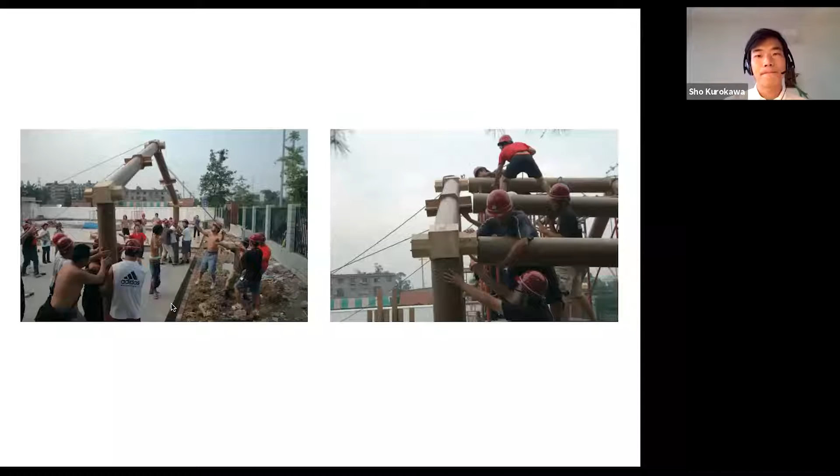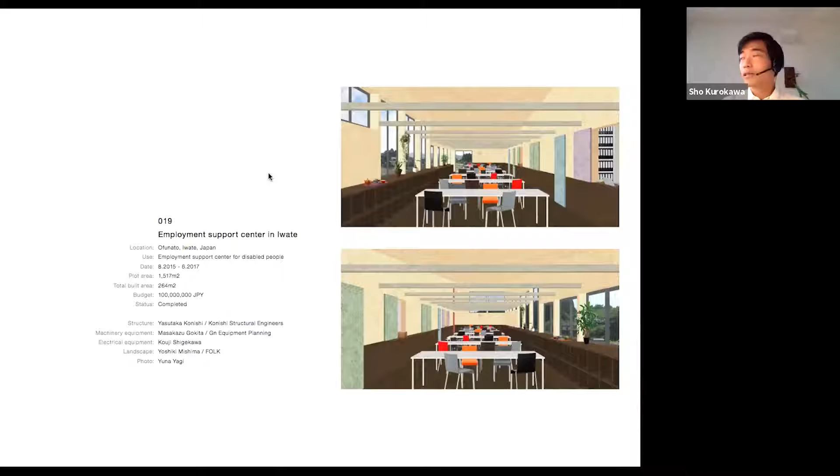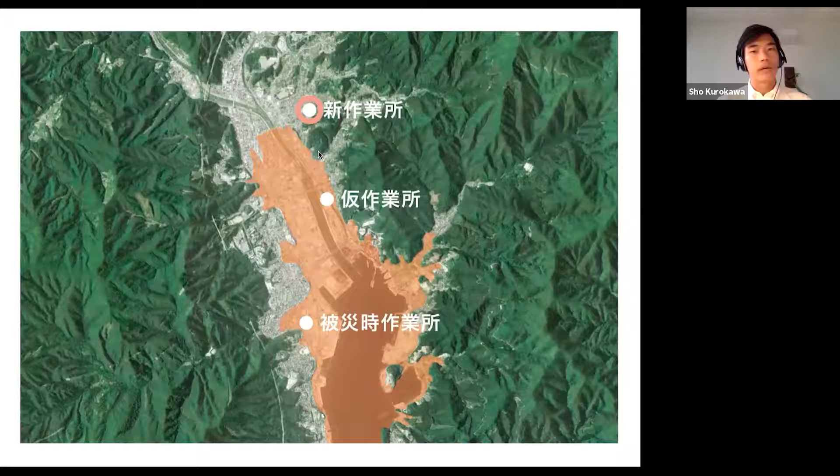They were looking for an architect and also trying to set up a kind of funding project. I was appointed by a support organization for post-earthquake activities. This is their temporary shed workspace, and this is the new site — quite a pastoral condition, whereas before it was right in front of the ocean. But now we're in a sort of hill location, and I placed a building like this, the white one.

This is basically the whole design, a result of negotiation between the philosophy of their organization, the client, and the given conditions of the project—budget, schedule. The budget was really tight, the schedule was not enough, and there was the environment to consider, plus how they wanted to settle into this new environment after the very difficult experience of the tsunami earthquake.

So therefore, I almost didn't try to make it beautiful. But it came out as a beautifully boring or beautiful banal building, yet still an interesting space, I believe. So this is the outcome.

The entrance needed to be, obviously, an entry condition, because the users needed to be ready to work when they came in through this red canopy. But still, I didn't want this building to stick out in the environment. So if you see it from the front, it has a certain presence, but from the back, it almost hides itself in the terrain, in the fields, and in the mountain.

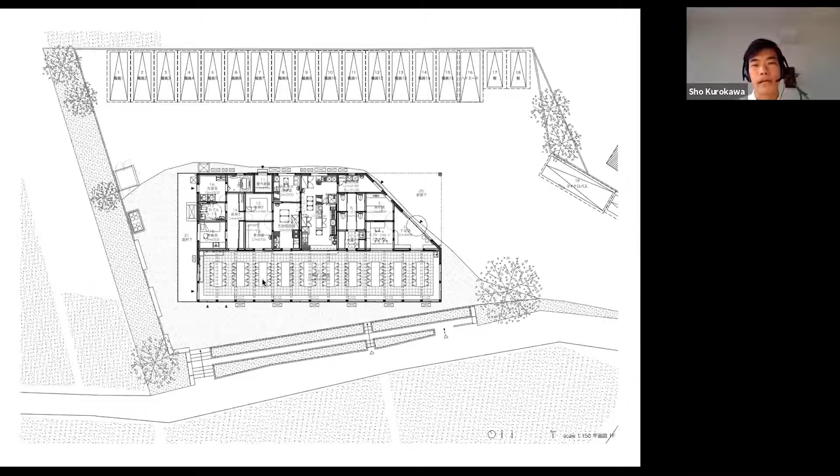And in this main space, it's full of different conditions—low ceiling rooms and high ceiling spaces, spaces full of light and spaces with less light, spaces without a view to the mountain and spaces with a view to the valley. So people here can work in the morning on the valley side, have lunch on the mountain side, and work in the afternoon in different conditions. They have choices now, not like before in one room without any characteristic—they have choices where to work, where they feel comfortable, within this very limited floor.

The spaces have different heights in each element. Only the beam stays, and also the lighting condition stays, but the windows, ceiling, acoustic condition, lighting condition, and winds all change within this one very limited room.

In the small rooms, I put in some small tricks—the wallpaper has slightly different colors. So if you come from the yellow room to the blue room or the other side, because of an eye effect, the space looks slightly different. It's a kind of trick so people can feel it's wider or has more variation within this limited space building.

After completion, there was an opening ceremony. More than 100 people came, and we sang, we danced—we really had a good party here.

A year later, I brought some musicians to the building and we had a small concert. Now with the coronavirus, I cannot visit them so often, but so far we have a very good relationship—they send us apples and some other fruits. I often call them, say hi, ask if there are any problems with the building, and so on.

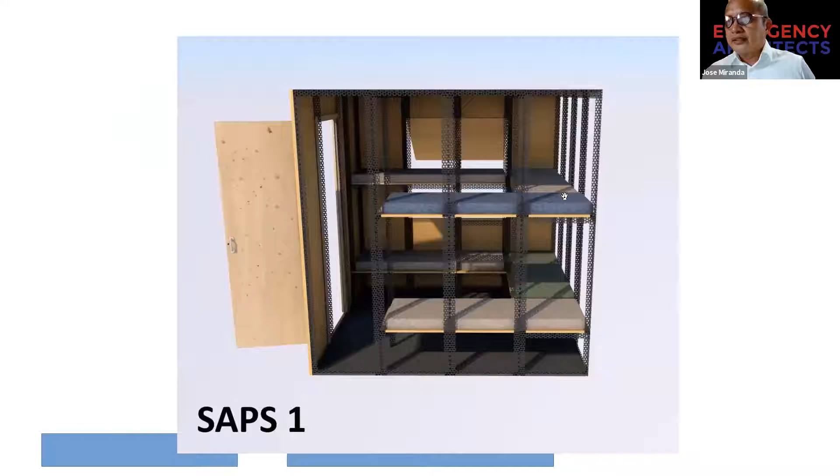Construction methodologies were brought forth towards simplest procedures with most minimal challenges in replication.

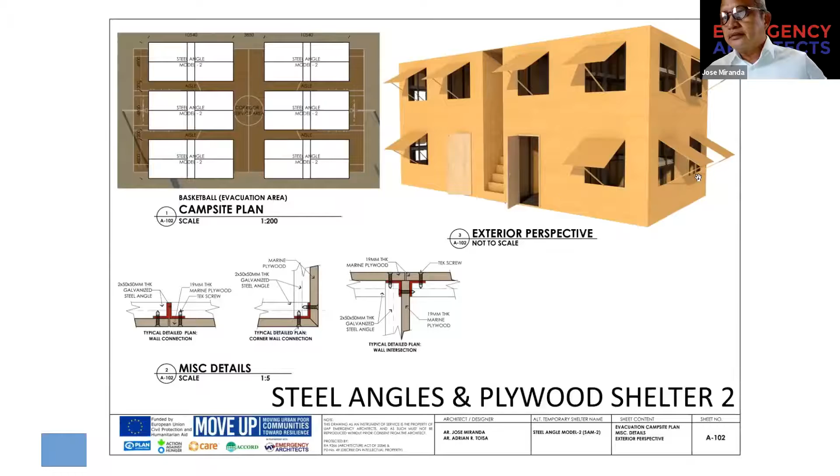To this, we added a component of a progressive design development iteration process where choice models are promoted in communities for deployment and testing, and end users themselves are encouraged to participate in the layout and fabrication.

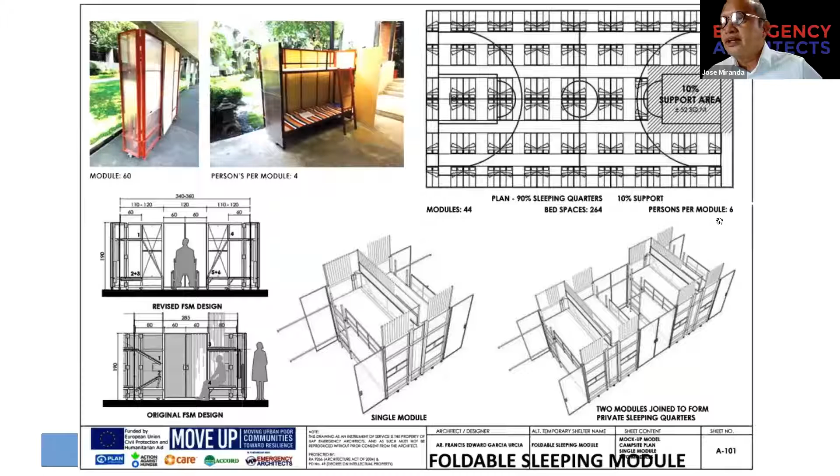The experience in constructing and actual utilization of the models allow them to take active part in the process of evaluating performance and feedback on issues that help designers in effective assessments to improve and fine-tune the ATS models.

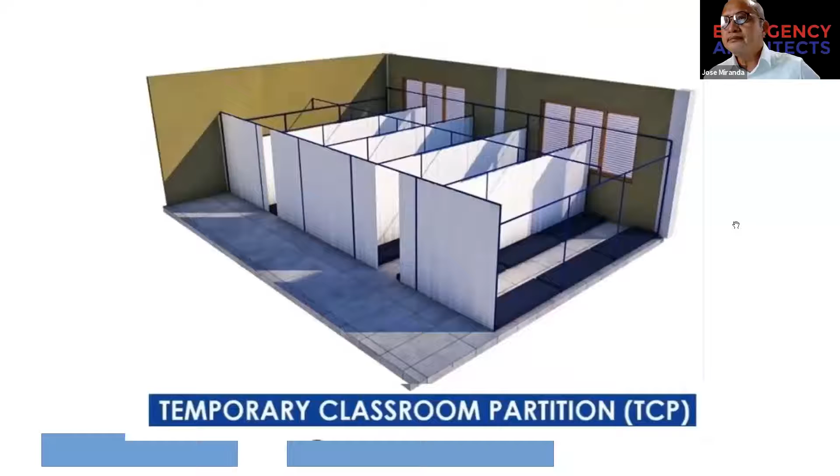Certain emergency events necessitate the need to improvise further in design to meet such challenges as immediate deployment, limited space, and budget constraints, such as in the 2 succeeding fires in dense housing areas northwest of Manila in 2018.

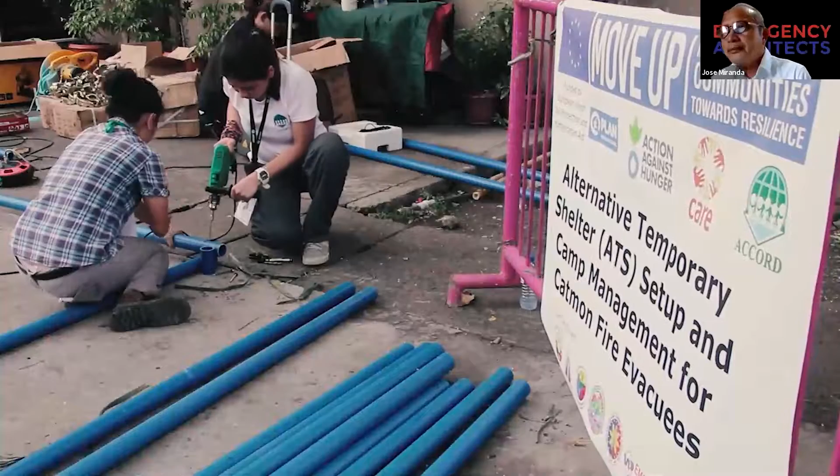A system of partitioning spaces previously introduced in classroom evacuation with the use of PVC pipes to divide the room equitably for 5 to 6 families, using plastic or tarpaulin hanged on the PVC frames as partitions, proved functional for transient sheltering, augmented by communal wash facilities.

The system is then applied to larger indoor basketball courts that maximize the temporary covered court partition facility to shelter 100 families.

The organized spaces provided a good measure of relief, privacy, and dignity for the evacuees.

It is significant that partner CSOs, Accord and CARE, recorded the successful evacuation camp coordination and management with the essential participation of the community in the planning and execution processes.

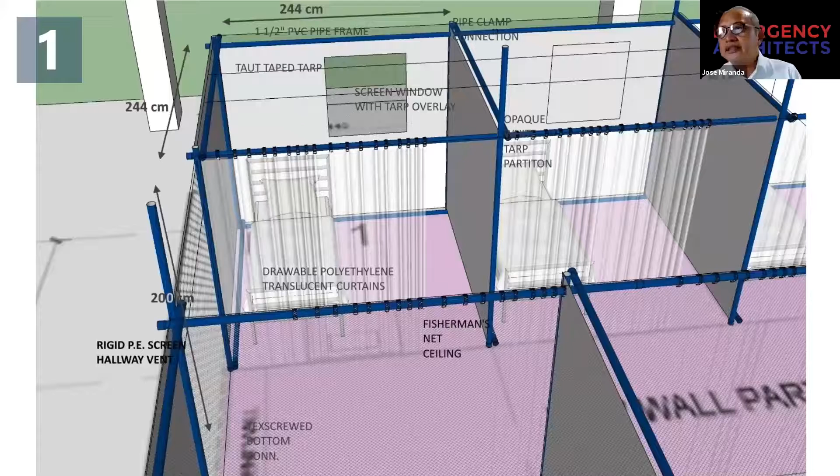The scalability and cost efficiency of this temporary covered partition system that simply makes use of PVC pipes for frame, connected by clamps and roofing screws, duct tapes, and screwed fasteners to attach tarpaulin partitions, factor in positively in the present scenario of the pandemic and addressing gaps in lack of facilities for community quarantine and isolation spaces.

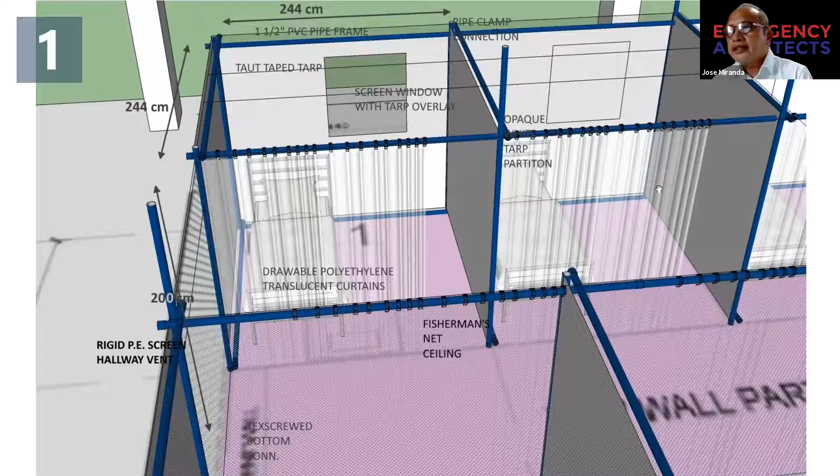As local governments put primary priority to monetary aid to communities locked down and unable to work, budget for construction of facilities stands at the rear in the funding queue.

A consortium led by Accord Care initiated the piloting of a public facility conversion to a community quarantine and isolation facility, referencing the previously developed alternative temporary shelter system.

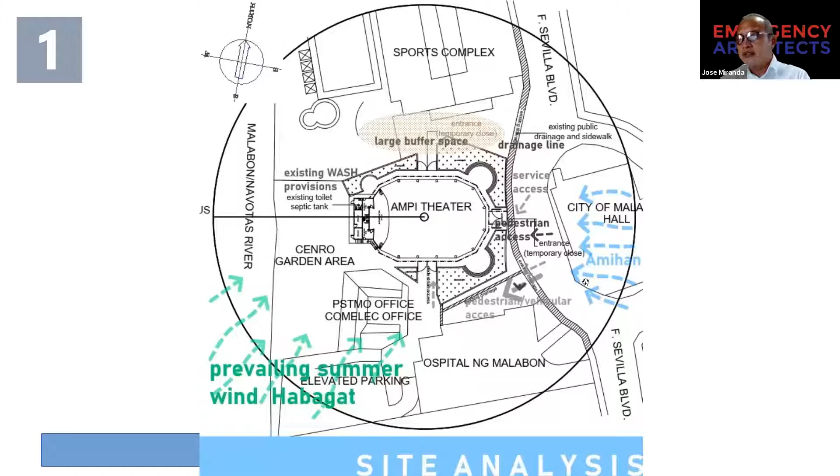A 940 square meter multipurpose roofed assembly court within its civic center was provided by the local government of Malabon as part of the city's solution to the issue on quarantine spaces. The facility will accommodate COVID-19 operations, relieving the city's primary level hospital to focus on regular admittance.

If prevailing conditions worsen, this facility will have the capability of converting into a functional treatment facility, on top of its immediate purpose as a localized staging area or for immediate transfer to secondary and tertiary level hospitals.

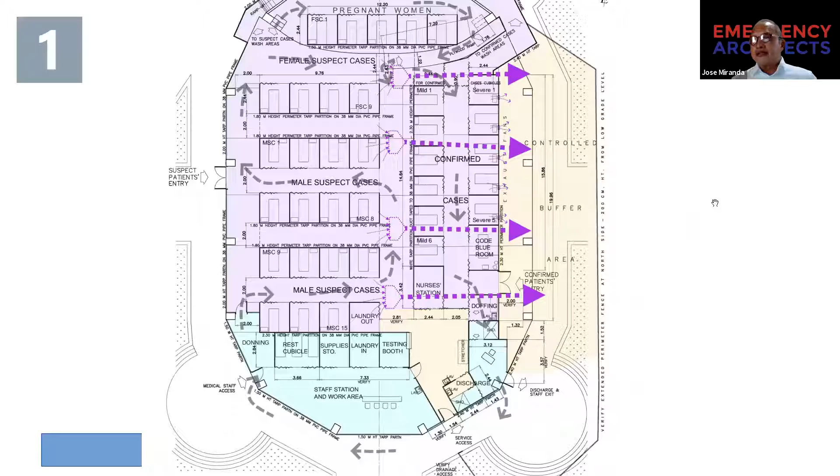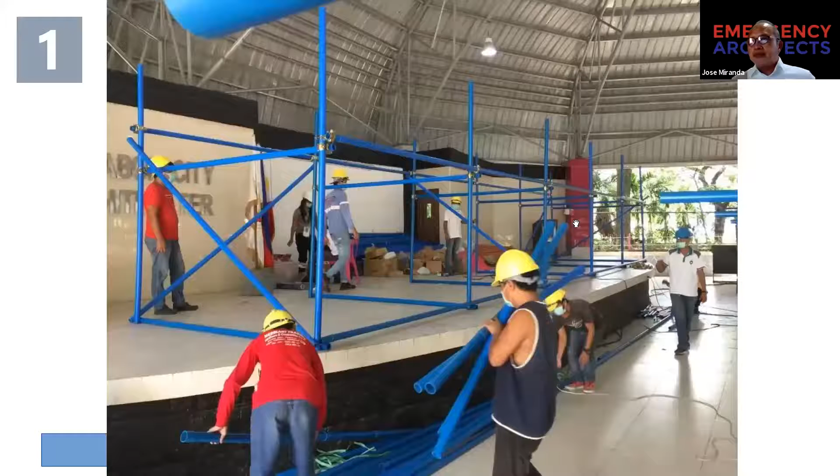The modular nature of this system allowed for the progressive spatial programming of the facility to comply with the recent guidelines outlined by the Philippine Department of Health and the World Health Organization of the United Nations in infection prevention and control, circulation, controlled zoning of areas, wash facilities, and assistive provisions for pregnant women and persons with disabilities.

Further consultations with local doctors from Malabon Hospital were also critical in determining specific needs like in-house medical activities with code blue capability to accommodate most levels of confinement.

Additionally, due to Malabon City's vulnerability to natural hazards, supports were installed to help brace the introduced structure against winds.

Emergency architects put in particular attention to IPC, manipulating the flow of air within the naturally ventilated environment to be directed to a buffer space of considerable size on the leeward side of the facility, where exit air particulates could dwell to settle on the ground after being exhausted by prevailing draft out of the facility.

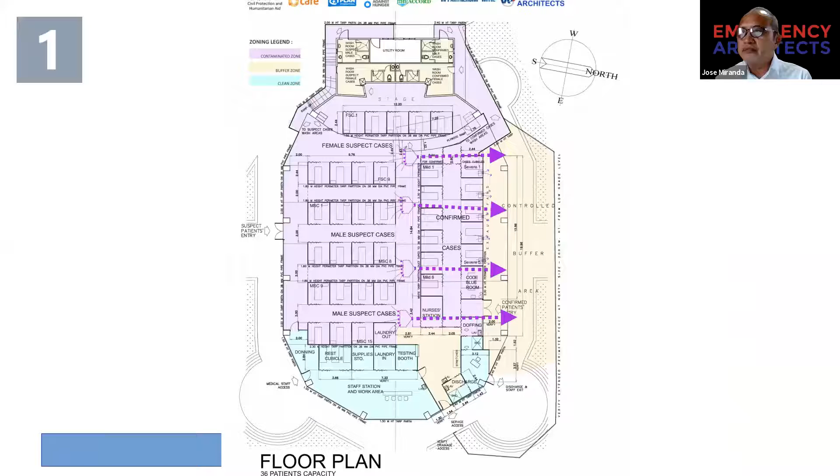Materials used in this intervention can easily be dismantled and stored for reuse in other future emergency events. Thank you very much. That's the end of my presentation.

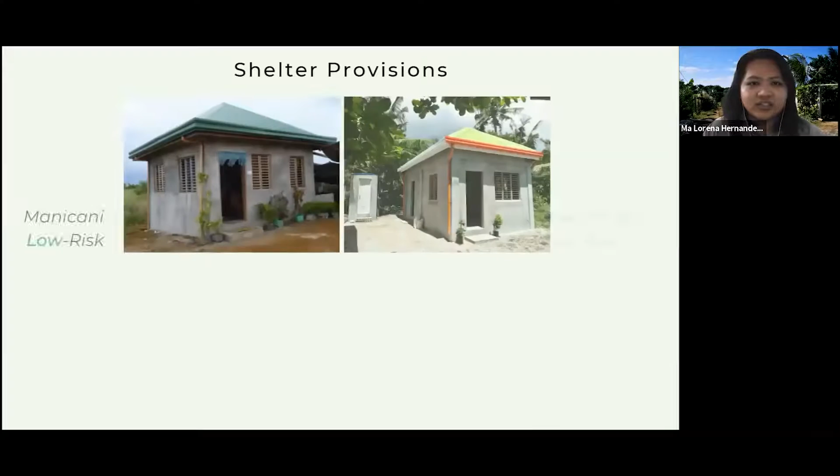The housing beneficiaries were asked to vote for their most preferred scheme. Here are the housing designs which were constructed in Manicani on the left side and Homonhon on the right side.

The elevation of the finished floor line from the natural grade line depended on the results of their risk assessment. For example, in Manicani, the moderate risk houses have been elevated by 1 meter, while in Homonhon, for moderate to high risk areas, they have been elevated by 1.5 meters.

The dimensions of the houses in Manicani is 5 meter by 5 meter, while in Homonhon it is 4 meter by 6.5 meter. Both houses have provisions for rainwater harvesting, wooden jalousie, 400 millimeter eaves, kitchen counter, septic tank, and toilets, and they are all made from reinforced concrete with wooden truss frames.

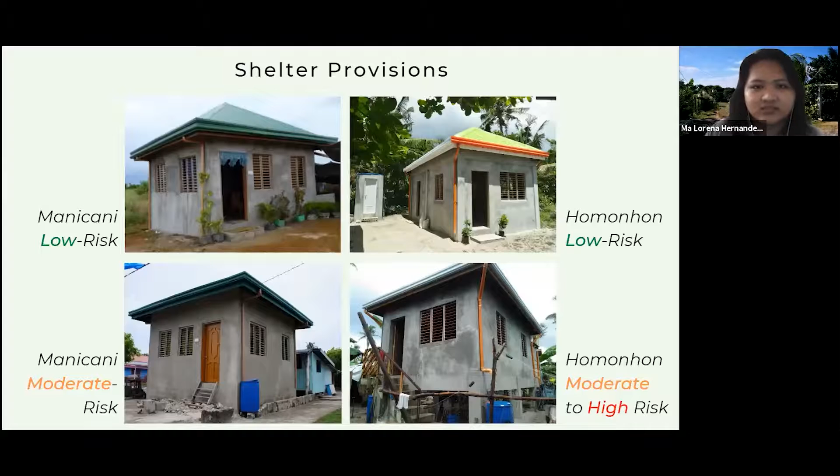Meanwhile, in Barangay Caga-ut and Salcedo, which is the neighboring or adjacent municipality of Guiuan, the barangay or local government unit were able to identify a low-risk area wherein the 23 housing beneficiaries will be able to construct the houses.

Similar to Manicani houses, this design of the houses in Caga-ut is also 5 meter by 5 meter, and it also has provisions for rainwater harvesting. They also have hip roof, reinforced concrete design components, wooden jalousie, septic tank, toilet and baths, and kitchen counters.

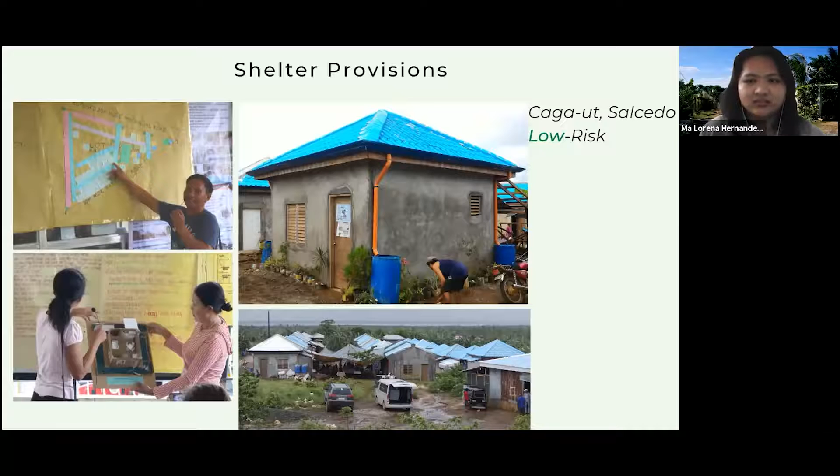After the construction of the houses, we also conducted a house extension workshop wherein the community beneficiaries would be able to construct their own house extension designs, so that they would not compromise the structural integrity of the core houses.

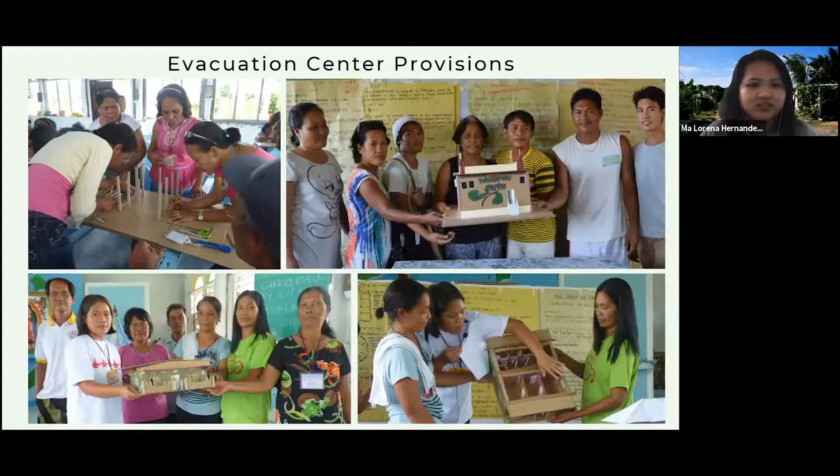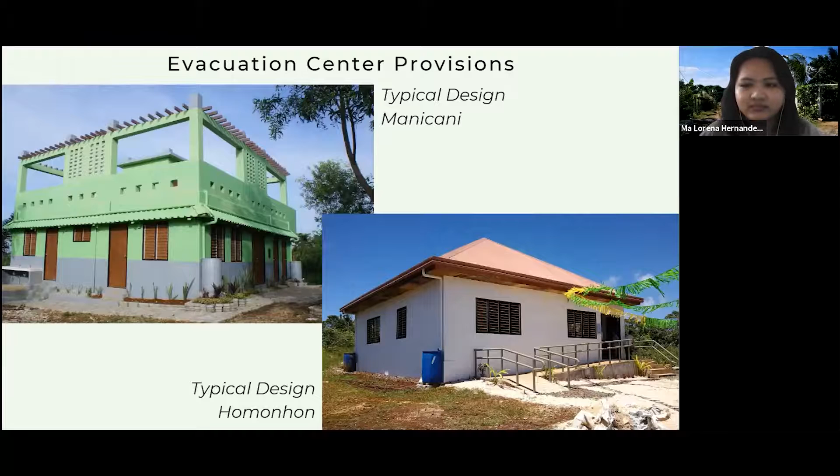The evacuation center in Manicani is 10 meter by 10 meter, 2 stories with a deck, and in Homonhon it is also 10 meter by 10 meter, but with a hip roof. Both designs have their own septic tanks, toilets, and rooms. The design for Manicani also has rooms for clinics and such.

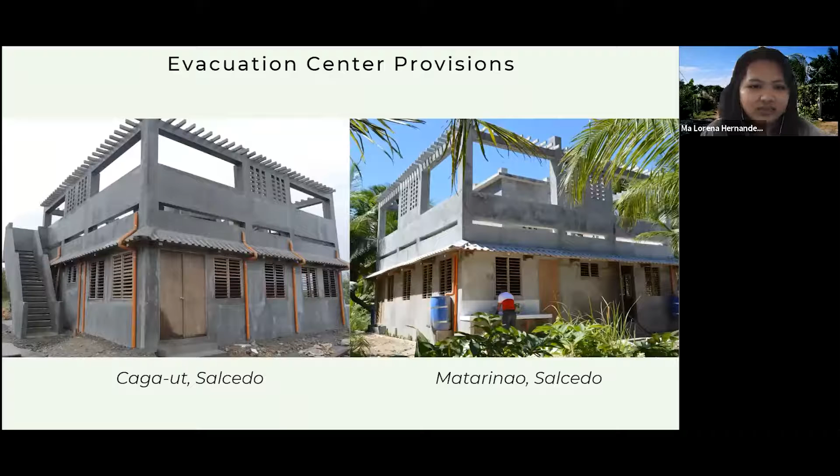Caga-ut and Matarinao, the two barangays from Salcedo, also adapted the design of the evacuation center in Manicani.

We also promote the use of alternative building materials. In Barangay Caga-ut, we use interlocking concrete earth blocks and micro-concrete roof tiles. The interlocking concrete earth blocks were used for two duplexes in the shelter project, while all the roofs in the 23 houses constructed had microconcrete roof tiles.

These microconcrete roof tiles were locally produced in Guiuan and then transported on site, while the interlocking concrete earth blocks came from Cebu. They were sourced from Cebu.

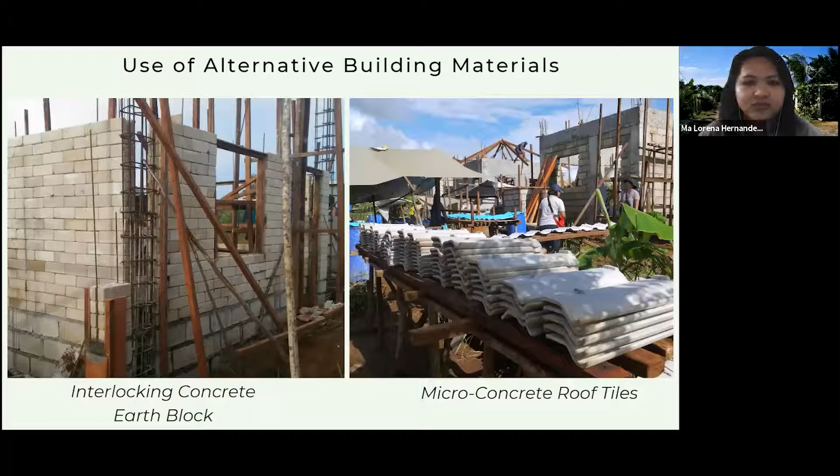Aside from that, we also have this project wherein we constructed a daycare center for a community, Sama sa Isip, in Isla Pulo, an offshore island from Barangay Tanza, Navotas, wherein they also used wood wool cement board and microconcrete roof tiles as alternative building materials.

This was constructed in 2011, but by 2017 they were relocated to a nearby site, also in their barangay, but on the mainland. So the whole island was deserted, due to the process.

Since this uses panels, the wood cement boards can be disjointed, and the microconcrete roof tiles can also be taken off just by cutting the nylon strings that were used to attach them.

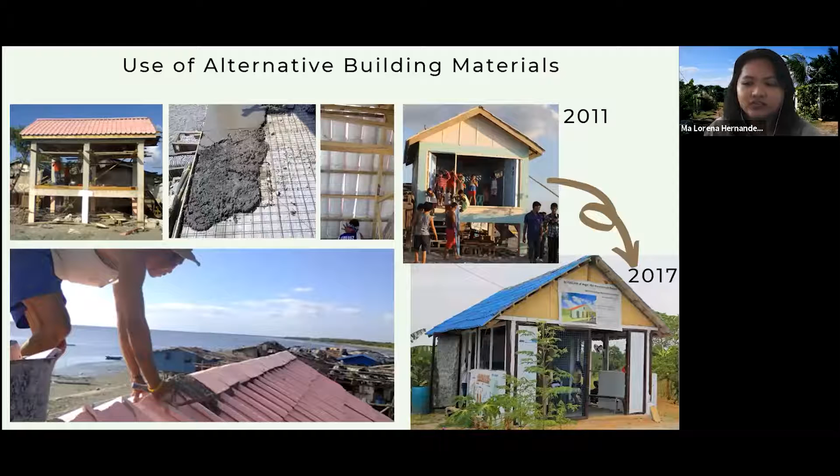That's all, thank you. Thank you, Engineer Hernandez, for sharing your people-centered projects in Eastern Samar.